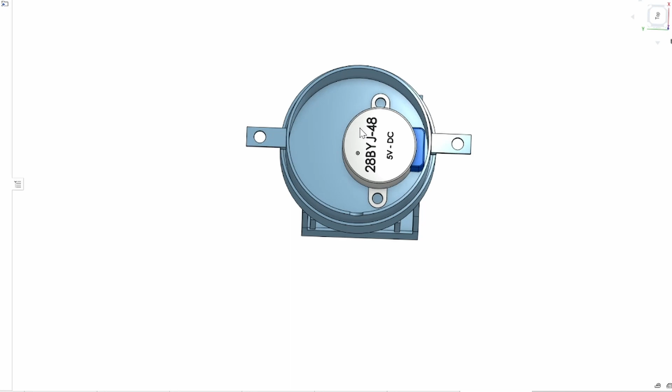A base with a pan stepper motor mounted and a spray protection shield on top. A U-shape to hold the tilt stepper motor, an upside down U-shape mounted on the stepper to hold and tilt the water nozzle. And here is the final assembly with the base, the shield, the U-shape and the reverse U-shape with the pan stepper motor and coming around to the tilt stepper motor, and then on top the water nozzle.

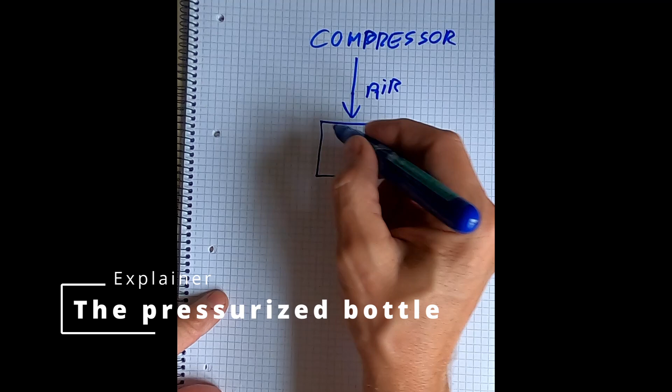My first idea was to drive the water by air pressure from a compressor that has an air valve that pushes air into the bottle, and then a hose that the water can escape through and go to the gun.

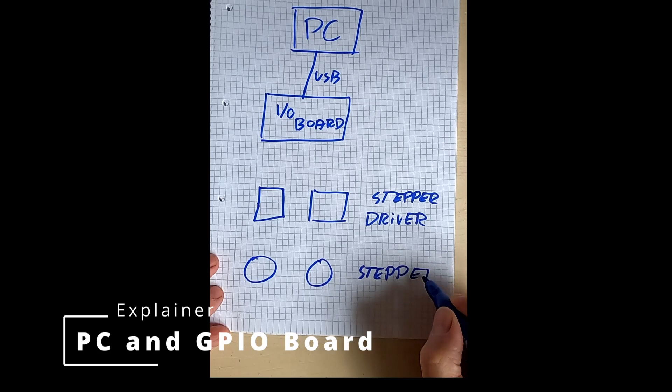The first prototype with air supply, the valve, and the 1 liter water bottle, and the gun nozzle. Controlled by a PC that had a USB driven I/O board, and from the I/O board 4 outputs to drive the stepper drivers that again drive the stepper motors.

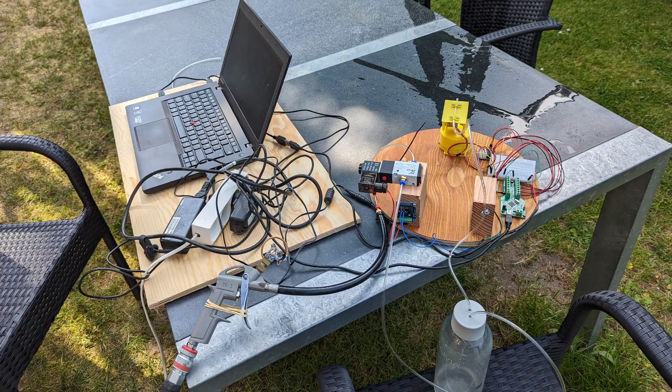Here you have a close-up of the model with the PC, and we are zooming into the GPIO board and the stepper drivers, just to show how fast the bottle will empty with air pressure from the compressor. Here's a short demo.

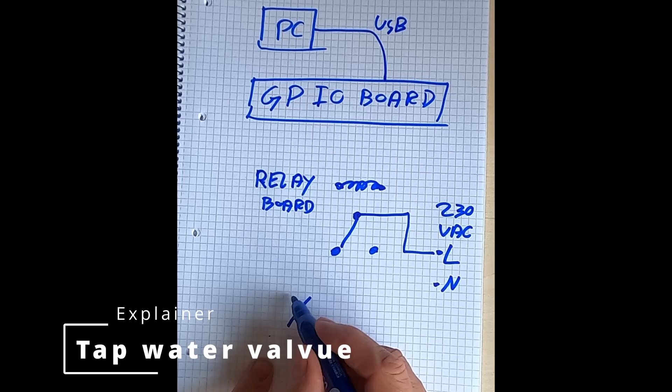Emptying half a liter of water that fast and then having to refill it is not feasible for me. My second attempt to make an unlimited water supply for the water gun was using a salvaged valve from an old dishwasher. Only issue is this uses 230 volt AC, so I needed to attach a relay board instead of the air valve.

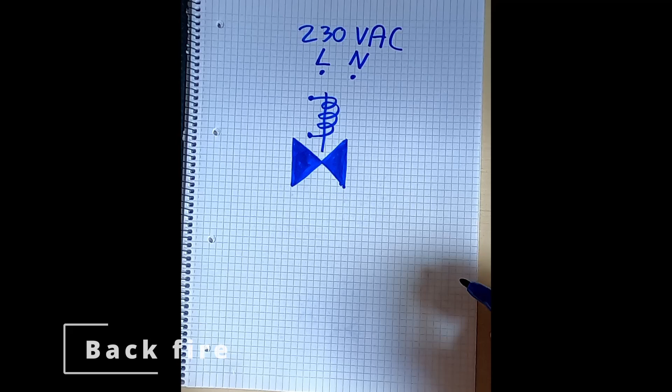Firing the gun went fine, the water started flowing, but when releasing, the current buildup in the valve coil would kick back into the relay board and then kick back into the GPIO board. This would render the GPIO board useless and lose communication with the PC.

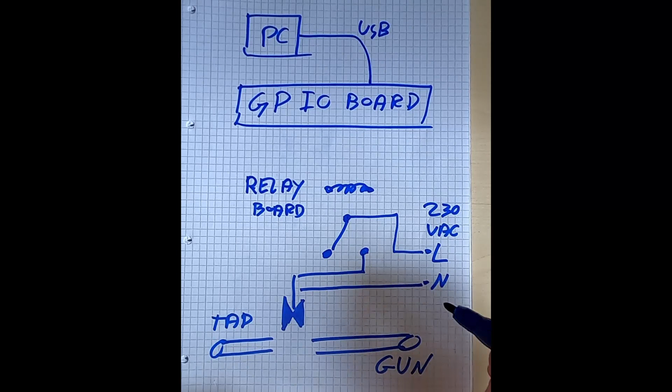Back to my previous explainer. Here you can see the solution was adding a capacitor between the live and the neutral wire. The capacitor will kill any kickback and ensure the boards are not damaged.

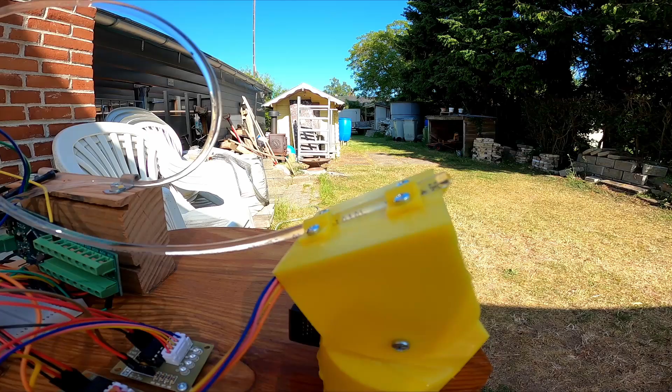Using a keyboard to control the water gun is an obvious solution, but being close to the water gun, hence being close to the PC, will probably draw you into a water fight. And everybody knows that water, computer, and electricity don't match very well.

To me, the obvious choice was to use MQTT: one program, the remote, listening for actions and posting them on a topic. And you have the water gun listening to the topic and executing the actions.

From my heap of USB devices, I pulled this joypad controller. I made a small program that reads the buttons from the joypad - up, down, left, right and fire - and sends the appropriate command, including an idle when you let go of the button, over the MQTT topic to the water gun.